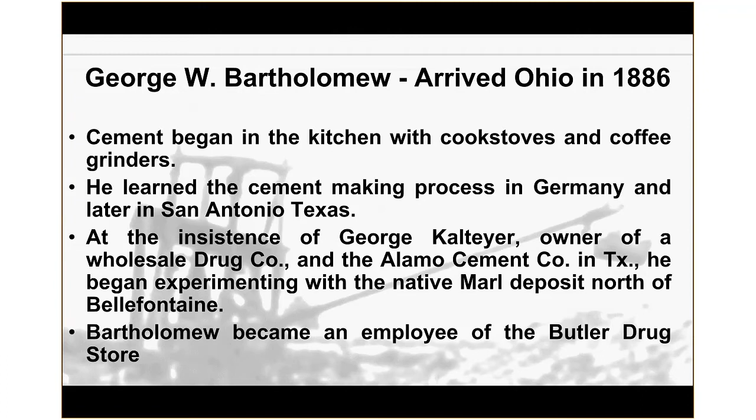and so the person again, George Bartholomew, his story is that he arrived in Ohio in 1886.

Do we have that slide up? Yes, we do. Okay, all right. I'll stop asking now. I just want to make sure we're there.

So anyways, George was from Germany, and he had spent some time in Houston or San Antonio. And he had learned the cement making process in both of those areas. And he arrived in Ohio in 1886, and he began experimenting with these native marl deposits. Now, the town of Marl, Ohio, is about 8 miles away. And in the background, you can see a very large, very old drag line.

And so the cement was being produced by drag lining this marl, which is a calcium carbonate rich mud. And so when we produce Portland cement nowadays, we use a source of limestone, a source of silica and a source of iron as a flux to produce Portland cement. And so these native marl deposits had a fairly perfect raw ingredient list that allowed this material to be fired in a kiln and produce Portland cement, not too unlike what we see today.

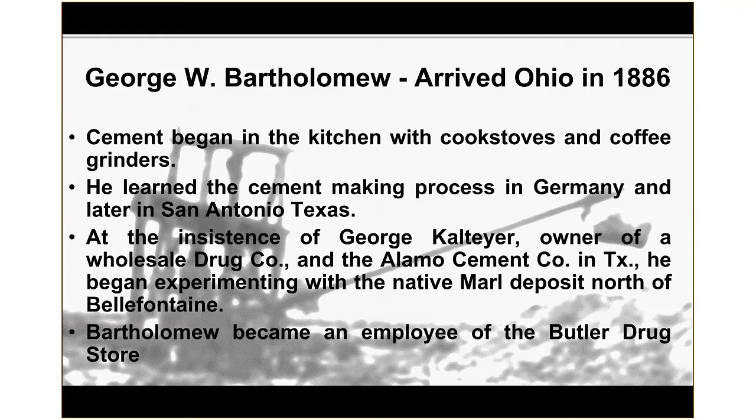So George was floating around in Bellefontaine, and he became an employee of the Butler drugstore. And in the back of the drugstore, apparently, is where he experimented with producing Portland cement with a gas stove and some coffee grinders. So he worked on this. He founded the Buckeye Portland Cement Company and mined this marl, again by that drag line in the background of the last slide, and he burned this material into clinker.

And when we drive off moisture off of calcium carbonate and the marl, again a source of silica, source of iron, we form a new set of minerals, and we form clinker, which are essentially gray pellets of various different sizes, which you then grind in a mill down to what we know as gray Portland cement, which is in a powdered form.

Now you can see in this picture here, when we have a big roller mill, nowadays we charge them with very large steel shot. Well, back then they used flint stones, and these were actually imported from Iceland, and these stones roll around with the raw Portland cement clinker, and grind it down into a gray powder, which we know as Portland cement, which we add water and aggregate to, and we make concrete.

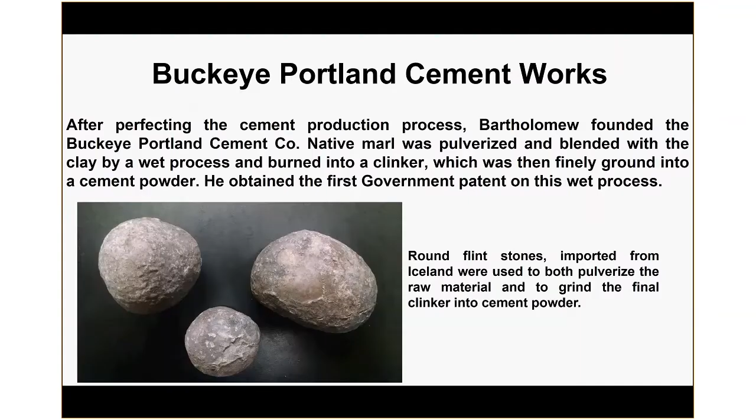So how did that go? And we're back. You guys to the Buckeye Portland cement slide? Yep, we're good. Okay, good.

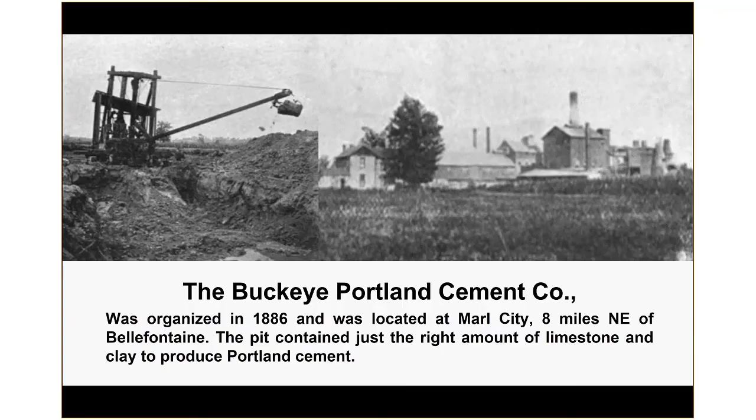I thought we might have messed that up, but so organized 1886, Marl City. The pit contained just the right amount of limestone and clay to produce Portland cement. So, with the first concrete pavement, there's a lot of other firsts that come with this. Now, the town was certainly skeptical of concrete. The only concrete that had been placed in the town was for a driveway for the lumber yard. And people believed that the concrete would get hammered by wagon wheels and by horse hooves. They didn't have any faith in how long this concrete pavement was going to last.

So Bartholomew actually had to warranty the pavement. At the time, there was a $5,000 performance guarantee. By 1893, people had agreed that this was a great success, and they removed a couple sections, and they brought them to the Chicago World's Fair, where Bartholomew won an award for innovation. So they were very impressed with the material, the longevity of the material, how it was doing, and thought it was a great opportunity to show off.

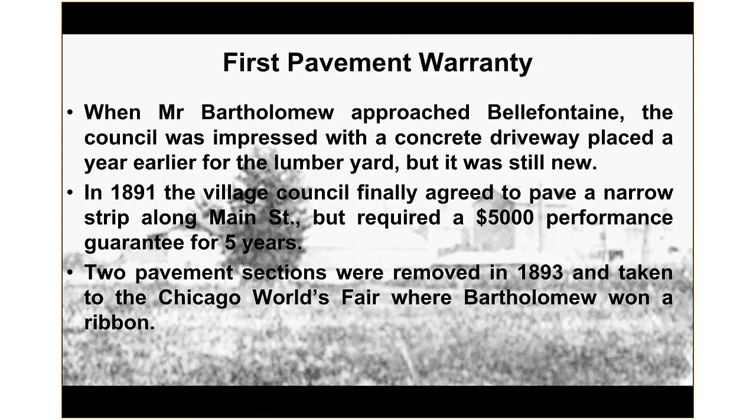So, hence, with the first pavement, we have the first concrete pavement contractor, WTG Snyder. The first strip was 8 feet by 220 feet. This was the 1891 pavement that we looked at. He had done some concrete walks and it used a similar ramming process, and basically concrete mixed back then.

I mean, we didn't understand about slump and all of that, and this material, as we'll see here in a little bit, had to be tamped into place because it was kind of a dry mix. It was very, very stiff, like dry oatmeal. It needed to be pounded in place by tampers.

So the first contract award in 1894 went to him for a road, and thereby he became the first concrete paving contractor. Back then, Bartholomew was paying $2 a day. Just some interesting notes here with this pavement. Again, they were ridiculed that this pavement would not last, and it did. And we're still talking about it today, and it's still in place.

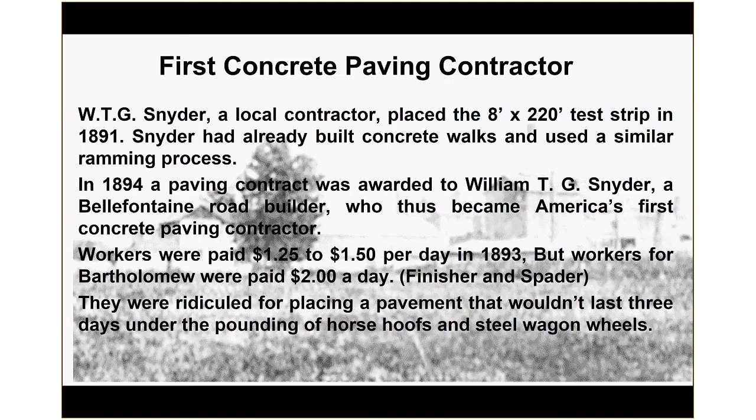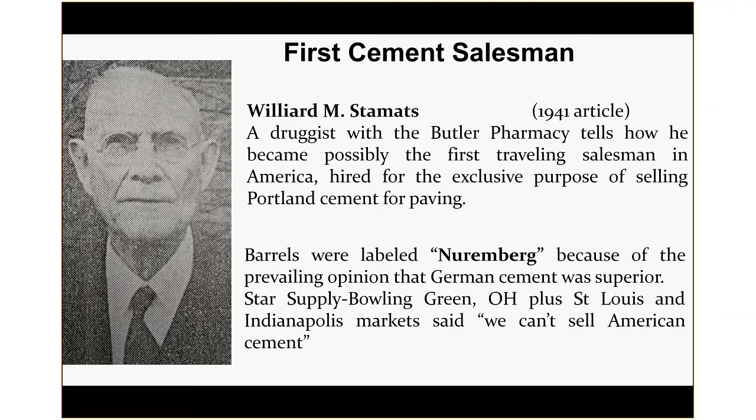And the samples that we analyzed came out of this 1962 repair. Some chunks were retained and saved. A larger portion of this pavement in the 60s had its subbase destroyed by a water main break, and they lost a lot of pavement as they grabbed a lot of these pieces out and either recycled them or brought them to a yard. So a lot of it was lost in the 60s. Now, interestingly enough, they took some cores out of the concrete that was saved, and we got compressive strengths upwards of 8,000 psi, which is in line with a lot of pavement we're doing today.

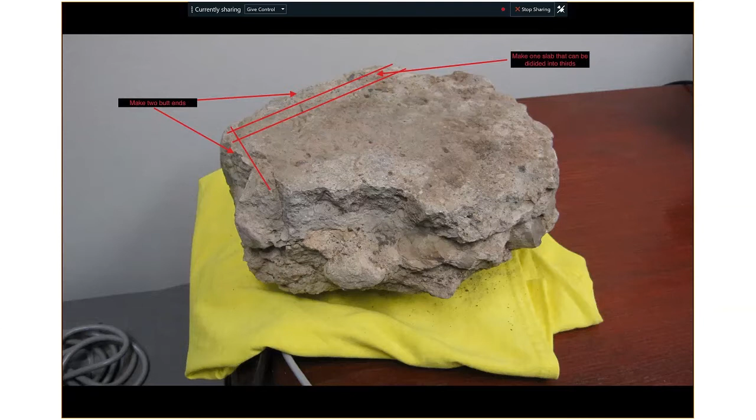This is a sample that was retained after the 1962 rehabilitation of joints. We conversed with Larry Sutter and received the samples here in St. Paul at American Engineering Testing for saw cutting analysis. We then saw cut some pieces out of this and another sample, this one here. You can see this one's a lot like Swiss cheese. A lot of these cores were taken for the compression testing that came upwards of 8,000 psi, and I believe a number of these samples were also passed around and given to people around the time of the 100th anniversary.

So some dignitaries had samples given to them of this great achievement in concrete durability. So you can see where we made some of the saw cuts to produce some slabs of this concrete.

And if you're not familiar with concrete petrography, basically you're saw cutting and lapping at progressively finer grits. You're saw cutting and lapping sections of concrete to put under the microscope and kind of reverse engineer the concrete and document the aggregates, the paste aggregate bond, carbonation, paste hardness, any types of reactions that are going on.

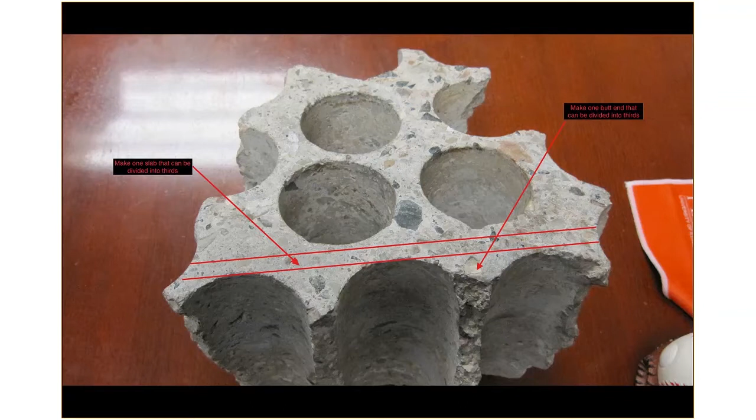And you also make thin sections of the concrete, which we'll look at, microscopic thin sections, so you can actually see Portland cement and anything else that's in there and get a better look at reactions and all that. So it's classic optical microscopy, again, per ASTM C856.

So we'll touch a little bit here on what makes concrete durable in severe environments. Now, a great deal of us online here are in states that see a number of freeze-thaw cycles. And in order for concrete to be freeze-thaw resistant, we need to start with a low permeability. And this comes with greater age of concrete. It also comes with the use of pozzolans, slag cement, fly ash, things like that can produce lower permeability concrete.

Minnesota Department of Transportation has a low water cement incentive for paving, a 0.40 water cement ratio, which produces very dense concretes, which keeps water out, keeps salts out, and allows the concrete to behave better in cyclic freeze-thaw.

Secondly, an adequate air void system protects the concrete. When you entrain an air void system into the concrete, and we're talking 6 or 7% little bubbles, they need to be fine enough and spaced close enough together to produce freeze-thaw resistant concrete.

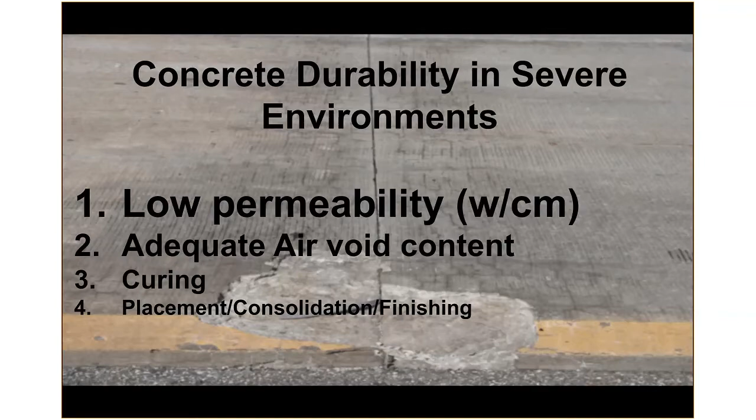Now this is a saw cut and lapped cross section of this pavement, and this pavement was about 6 to 8 inches thick. We can see the top of the pavement's at the top, the bottom of the pavement's at the bottom, and we've got this lapped cross section. Right away we see a definite color change, and when a concrete petrographer first saw cuts and laps a section of concrete, we look at aggregate distribution, colors, sand distribution, paste, and all these things.

And what we note right away is this very interesting layered appearance. And this is the way this concrete was placed. The first lift of this concrete was very chunky, a very low slump, if you will. It was under consolidated, so there's a great number of consolidation voids. They're hard to see, but the very chunky nature of this concrete was due to the aggregates, the gap grading, and the low water. And so they tamped this material in place.

We notice this upper layer that's an inch and a half to 2 inches thick, the centimeter scale on the side there. And we notice this is gray. It's very much more well consolidated, a higher slump. And note that the aggregate is more of a pea gravel and torpedo sand, a very coarse sand. This looks not unlike a mortar setting bed that's got pea gravel in it, a similar gradation to concrete block, but a much denser concrete. And we note that color change.

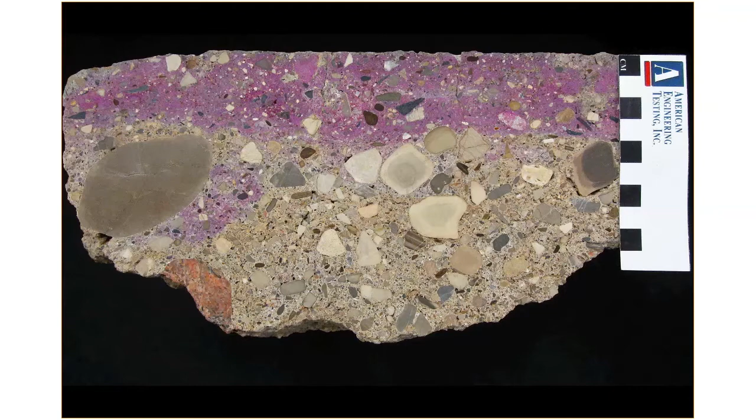Next slide, as we get a little closer, we're under magnification using low angle light, which casts some shadows. First, we've got a 6.9 millimeter depth of carbonation. It's ranging from negligible just to the left there, and spikes upwards of 7 millimeters along cracking. You can see a crack with carbonation intermittent along it. A little farther to the left, you can see that crack progressing vertically down through the concrete. We can see some areas that are carbonated.

Now, another interesting thing to note here: we were talking about air entrainment and the necessity of having little bubbles well spaced throughout concrete to relieve the pressures of freeze-thaw and make concrete durable in the severe freeze-thaw environments which we know our bridge decks, curb and gutter, sidewalks, and pavements go through. And note all the little black bubbles. We've cast a low angle light across these, so these bubbles show as dark voids. And we see a lot of little voids throughout this concrete.

Now, what we have to remember is air entrainment in concrete was not realized and not thought of as important until the 1950s with Powers. You can look up work by Powers in the 50s on freeze-thaw resistance of concrete with air entrainment. We did not realize this until the late 50s, when we started actually specifying concrete with air entrainment to relieve the pressures of freezing and thawing.

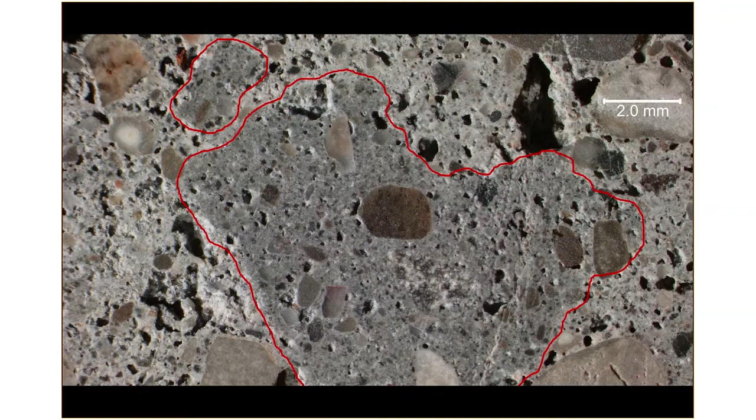The concrete was cured by the continuous wetting of 2 inches of sand, so this is old school, putting wet sand down on this concrete and keeping the sand wet for 1 week. So that's from Billy and Luke Snell in 2002, their article The Oldest Concrete Street in the United States. So hand mixed, and so we don't expect the greatest mixing. We got these areas that were a little bit denser and undermixed, and so all in all, they did a great job, but we can certainly find these anomalies.

Here's another anomaly outlined in red of darker, denser concrete that had fewer air bubbles in it, just part of the mixing process. And note that cracking up towards the top surface. There are some white secondary deposits, and there are some cracks that are very white and filled with secondary material. So very interesting there. We'll see some closer views of that.

Now here's again a saw-cut cross section under higher magnification. Note all the little bubbles. This concrete looks practically air entrained, and this could be mistaken for a very recent concrete pavement. I mean, a lot of concrete that's going in in Minnesota, Wisconsin, all through the Great Lakes, all through the frost belts of the United States, this doesn't look like that bad of an air content that is purposely entrained, either using a natural Vinsol resin or a polycarboxylate, newer synthetic air void system that we put in concrete to produce freeze-thaw durability.

So crude oil as fuel for the kilns to burn the limestone and produce clinker, crusher oil, or tallow, again used as a grinding aid in crushing this material, likely put a surfactant of some kind of organic material into this concrete and produced air just by sheer accident.

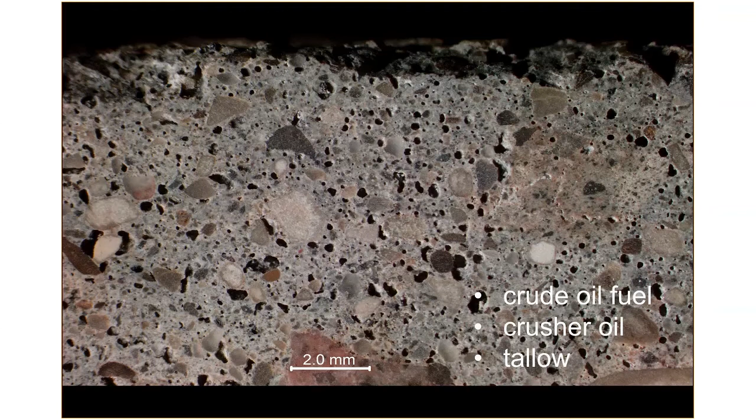So we look at the lower lift of this concrete pavement, and we see lots of large voids, under consolidation, and again the gap graded nature of the coarse aggregate, having some 1.5 inch aggregate in there, 3/4 inch aggregate, and again the torpedo sand, mixing this in a very chunky nature, and then tamping it into place.

And this looks not unlike pervious concrete pavement. Pervious concrete pavement has upwards of 15 or 20 or 25% void space. One of the true measures of a pervious pavement is having open base, and you can pour a 5-gallon pail of water on this concrete and it drains to the grade. And there have been lots of experiments with pervious concrete pavement.

There is a well-known placement of an entire neighborhood just north and west of Minnesota Department of Transportation offices, produced with pervious concrete, that has performed admirably over, I believe, 15 or 20 years. Someone correct me if I'm wrong, but it has performed great. This concrete has upwards of 8% void space, under consolidated, likely drained quite well, keeping the water out of it and increasing the longevity of this concrete in freeze thaw.

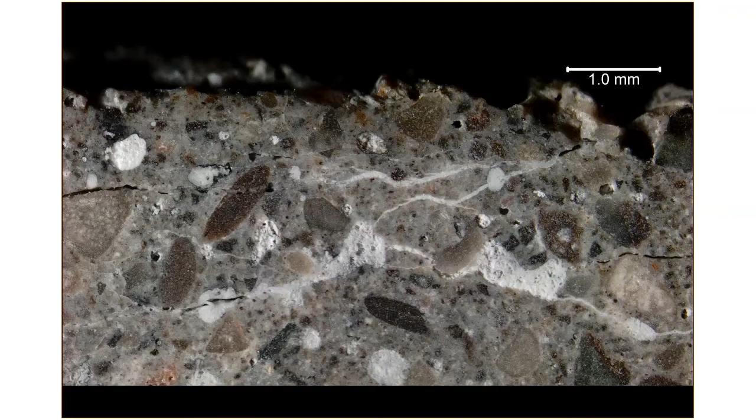When we make a thin section, which is a glass slide with a very, very thin slice of this concrete on it, basically we saw cut and lap another section. We epoxy impregnate it. We glue it to a glass slide. We then cut it off very thin, grind it down much thinner, and polish it. And we put this under a polarizing light microscope, or petrographic microscope, which passes light through the thin section.

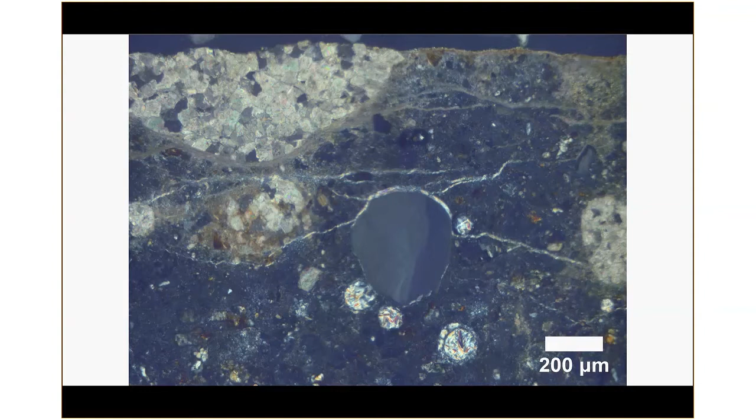The cracks are filled with secondary deposits, and they've kind of self-healed this concrete. These secondary deposits are of calcium hydroxide and of calcium carbonate. Calcium carbonate is exactly what limestone is made of, and it is one of the most common secondary deposits in or around concrete.

This image here that has this kind of fluorescent cast to it was produced by Karl Peterson at the University of Toronto. In fact, Karl was a former petrographer for Minnesota Department of Transportation a number of years ago, and a graduate of the University of Minnesota. After he left Minnesota Department of Transportation, he went on to be a researcher under Dr. Doug Hooton at the University of Toronto.

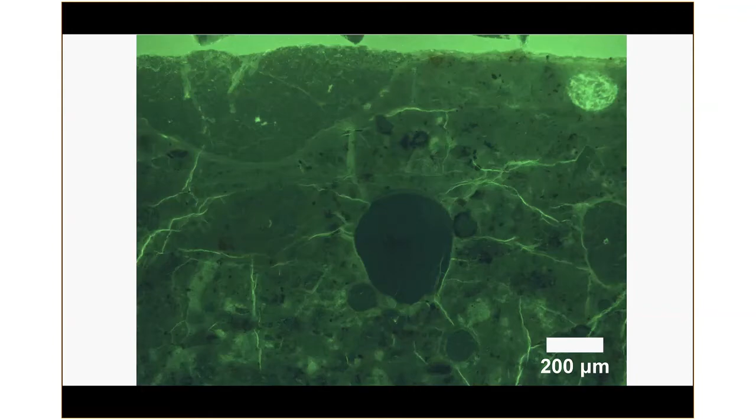Now this concrete is not without problems. This concrete has certainly seen freeze thaw at the joints and freeze thaw of the aggregates. The Minnesota Department of Transportation, Iowa, Ohio, and just about anywhere that uses or used limestone aggregate in their concrete has been vetting carbonate aggregates for many years. A certain number of carbonate aggregates will break down after 5, 10, or 15 years. They break the concrete down because the aggregate is generally a dolomite, which is more porous than a limestone, and it is not freeze thaw resistant.

When all of your aggregate in concrete is made up of porous limestone, you get D-cracking, which is the concentric pattern cracking at joints, especially at the intersection of joints in old pavements. Minnesota Department of Transportation, as an example, has outlawed limestone aggregate in just about all pavement, except right down at the Iowa border, and they utilize granite, which is not D-cracking susceptible.

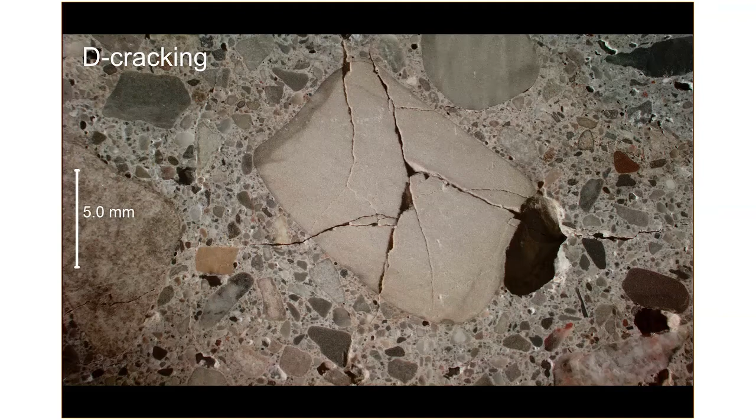But we see D-cracking in this pavement. We see certain aggregates that are blowing up. This is a problem that states were dealing with for decades and decades. A closer view of this dolostone cracking, with the cracking proceeding into the paste in the lower right hand portion of the image.

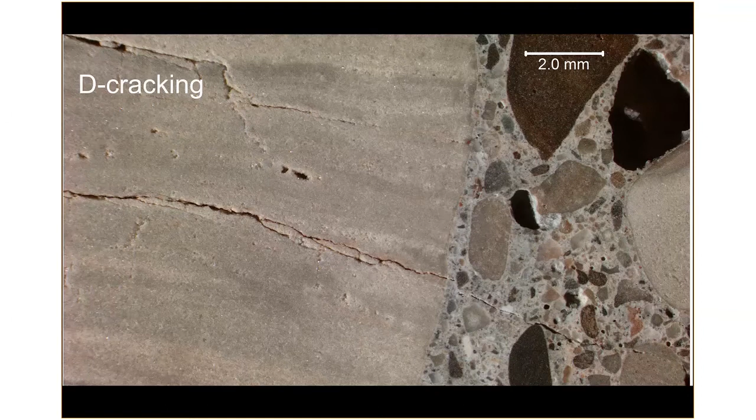There is some alkali silica reaction. Alkali silica reaction is a reaction between a susceptible aggregate that contains disordered quartz. In this case, it's chert. The alkalis in the paste, the high alkalis in the paste, the hydroxyl ions, and the alkalis such as sodium, which the whole system is flooded with. There's also potassium and a few other alkalis, and these kind of attack disordered quartz and produce a gel. The gel is hygroscopic, moisture can get to it, it's expansive, and you can produce cracking.

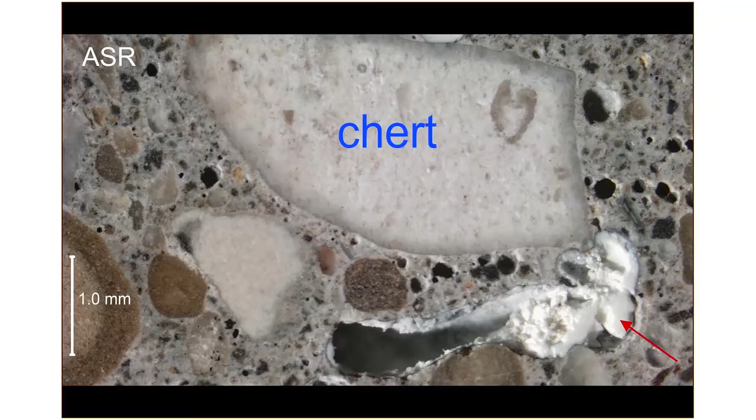Nebraska is going to see a number of particles like this in their sand-gravel concretes in the middle of the state. Minnesota is going to see a number of particles like this that are going to react over 20, 30, 40 years. And our shales, which would require a whole other hour to talk about, the shales in Minnesota are going to be very quick and produce small amounts of gel like this, but do not produce bulk expansion. Another example, chert and some ASR gel.

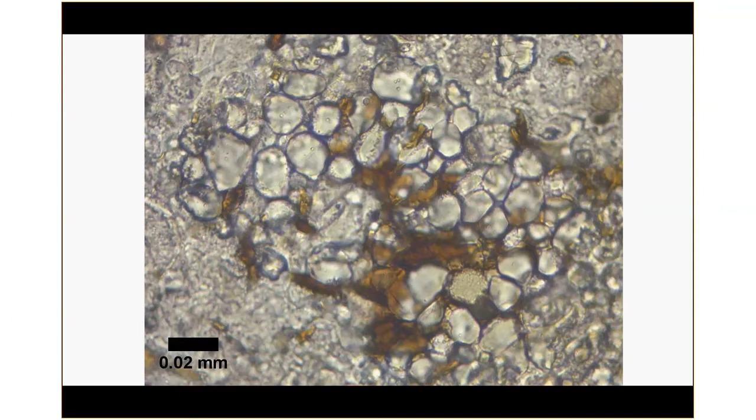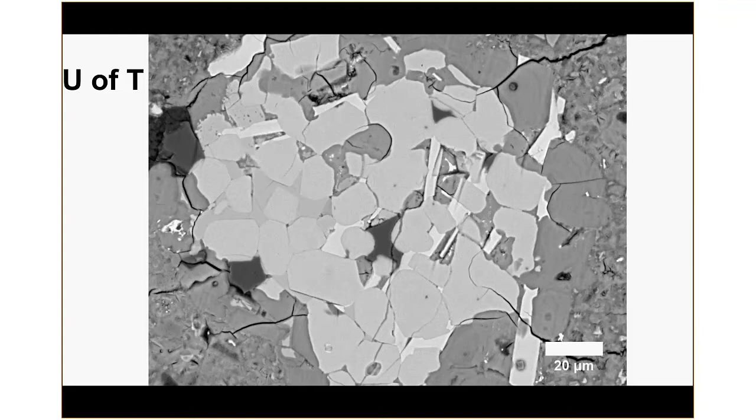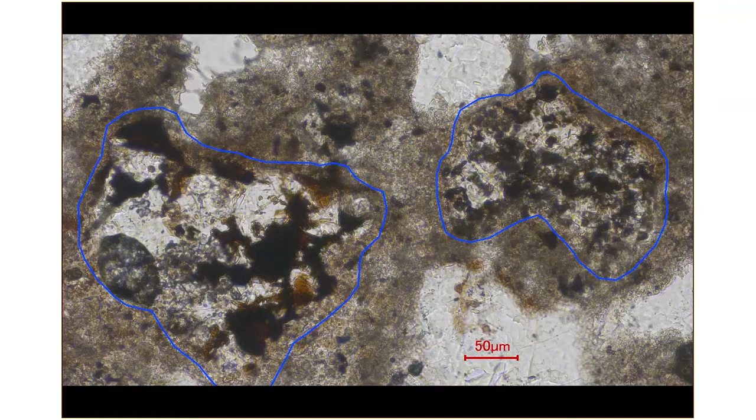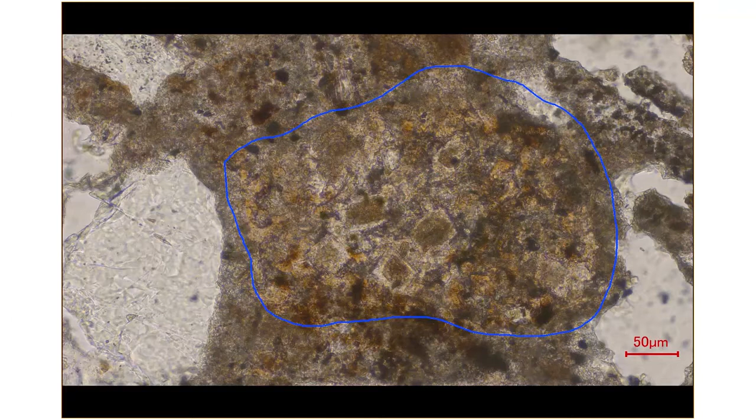So in the interest of time, we're going to keep moving here. Some more cement particles, a little bit more crude. There's actually some unburnt marl or limestone in here. We actually see some dolomite rhombohedrals in the center of that mass that's outlined in blue. So we can see a lot of the burning process, very crude. You would not see this in modern Portland cements, unburned materials, but they were there.

So finishing up for questions and answers, the work that was done by Dr. Jason Weiss at the University of Oregon did some C642, which is a basic void spaces in concrete. The upper layer came up with 15.9% porosity, the lower 17.9. Resistivity very much higher in the upper layer. Again, this has to do with the non-carbonated, very dense nature of that, so much higher resistivity number versus the lower. He did some absorption work by neutron radiography, which was kind of all over the place.

Again, very interesting types of work done here and procedures, but these are working much better for new concretes. This concrete being 128 years old now, versus having fresh concrete that has high pH, and comparing it to fully carbonated concrete, some of these procedures weren't exactly going to work out too well. The thermal gravimetric analysis, TGA, again, going to be very different because there's going to be calcium hydroxide in the upper concrete, and there's none of that left in the lower concrete because it's fully carbonated.

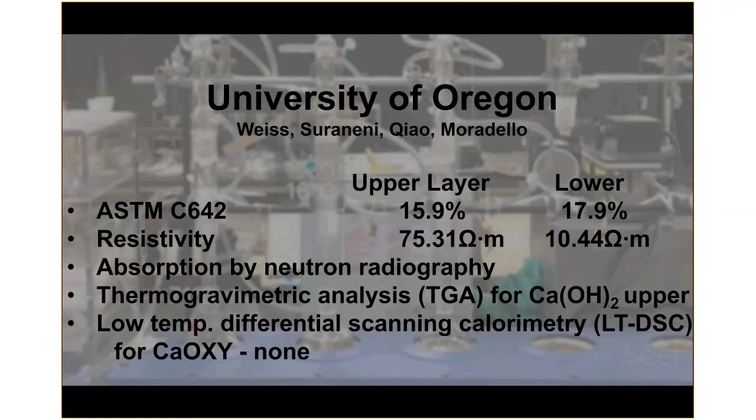Low temperature differential scanning calorimetry, another very interesting test that Jason Weiss is experimenting with. In this case, he was looking for calcium oxychloride, which is a destructive, kind of a ghost mineral, but a very destructive ghost mineral. And he found none of that. So that's kind of wrapping it up with those analyses. I'm open for questions, I believe.